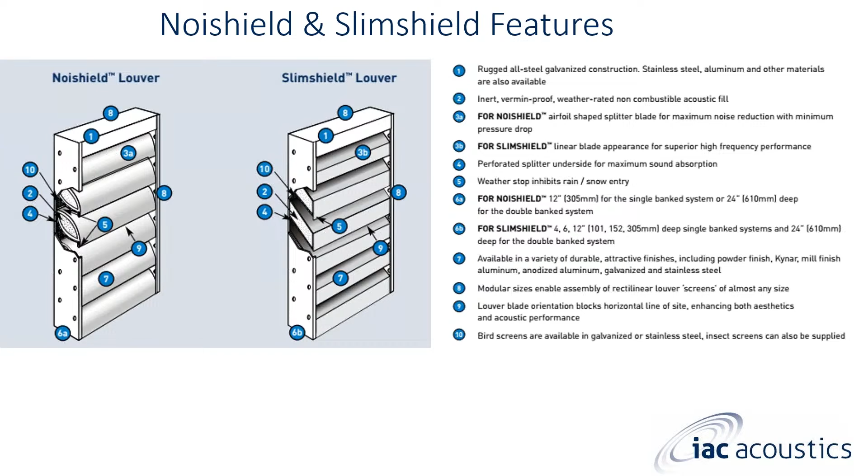Moving on, all of IAC louvers have been developed in response to specific requirements from acoustic consultants, consulting engineers, building owners, and contractors. Again, everything has been tested. The complete range of acoustic louvers for controlling the airflow noise in and around the air handling systems.

Acoustic louvers for use around mechanical plant installations where acoustic barriers may be required and airflow still needs to happen. And then again, aesthetic louvers that can come in many different shapes and sizes and can still carry performance requirements. All of our louvers have been performance tested utilizing the AMCA standard 500L testing criteria.

Again, our entire line of HVAC louver products provide one of the most economical choices for solving the wide variety of airflow and noise control problems encountered in HVAC engineering. As you can see on the left, we can do all different types of shapes and sizes. We've done multiple arrays. We've done circles, we've done stars, we've even done triangles.

So you can work up a sketch in CAD or just by pen and paper, send it to us, and we can work that up ourselves with our engineering team. And then we can also put together a nice comprehensive package for you, letting you know how the performance is going to be and where the performance will be within that size or shape of louver.

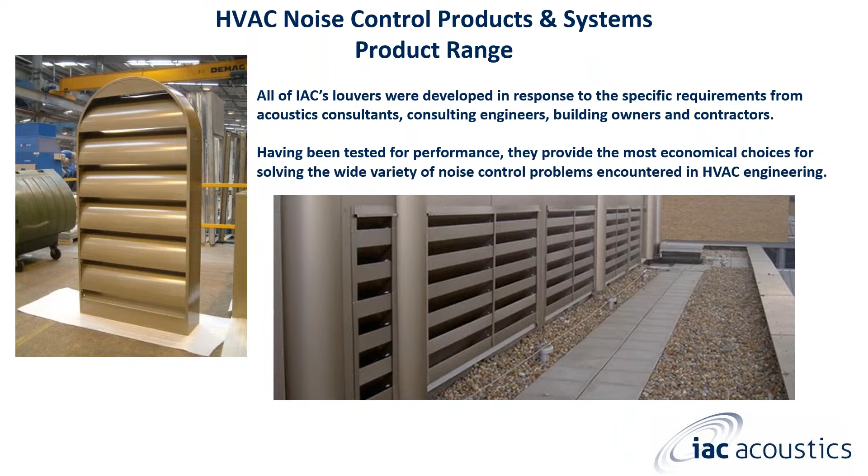Duct silencer and louver operating principles. When you look at a louver, you have reverse flow and forward flow on the left-hand side, on the outside, and on the inside, you have your sound source. Now, I get asked this question quite a bit. Should we design to percent of free open area first, or should we design to performance? I'm old-fashioned. I'm going to tell you design to performance first. Percent of free open area will literally be what it is, to tell you the truth.

There is a free area of the Model R and the Model LP, for example, here. It varies across the width because the blades are airfoil shaped. So at the intake and discharge of the louver of the original opening here, you basically have 100% of free area, right? But at the closest point it gets down to around 18 to 20% of free area. Because of the diffuser effect on the discharge side, however, you actually get what is called a pressure regain, and the louver performs much better than, say, 20%, maybe 30% free open area.

Based upon our testing and analysis, the Model R louver's pressure drop performance is equivalent to a straight bladed parallel louver with roughly 46% free open area, and the Model LP is roughly a straight bladed louver with a 50% free open area. So the pressure drop listed in our catalog is based on face velocity across the entire face of the louver, not just the free area face velocity.

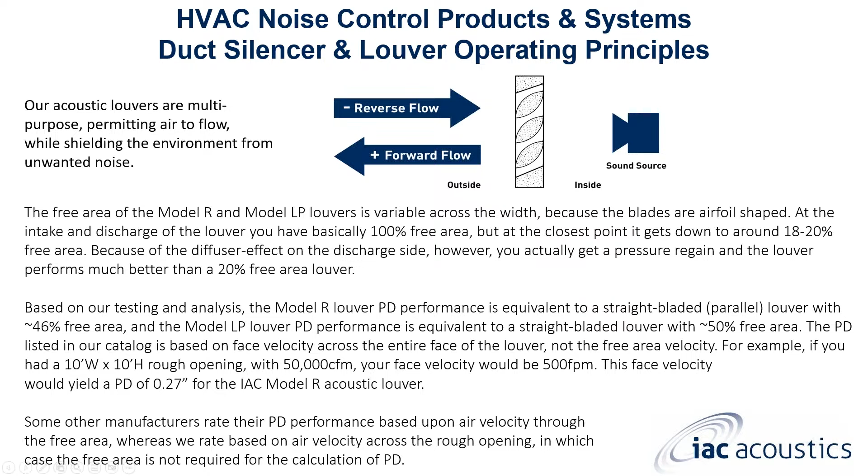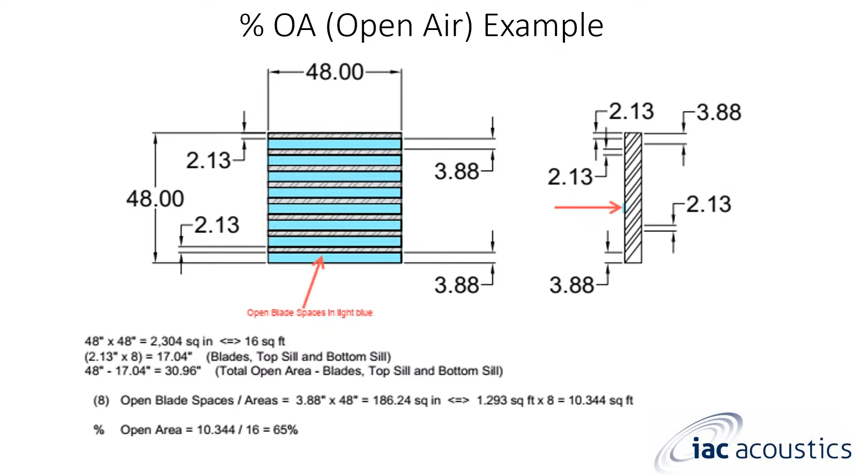Again, we like to design to performance. I always tell everybody, design to performance first. Make sure that the pressure drop is in relation to the actual pieces of equipment and it's allowing the proper airflow. Once you have both of those working tandemly and correctly, percent of free open area will end up what it is. It will not harm the system because you've already designed it to performance, airflow, and pressure drop, making sure that you're not putting any impedance back on the pieces of equipment that it is actually enclosing.

Acoustic louvers can be screens and ventilation openings. They can also be integrated as doors, which we'll see here in just a few minutes. When you look at our acoustic louver brochure catalog, we also have some typical details that are shown for supply of all supporting steelwork if necessary. We show that there's different ways of installing the louver with a flush exterior, a flanged exterior, masonry anchors, concrete inserts or anchors, flush with the interior, and then also a bolted connection to HSS type tube steel.

If you need any type of design work as well, IAC, our engineering team, and myself can actually help out with the design phase. We can help call out the appropriate tube steel, and we will also look at wind calculations to make sure that the overall height of the louver screen or louver wall or enclosure will be supported enough with the tube steel in conjunction to the wind rating that might be out there.

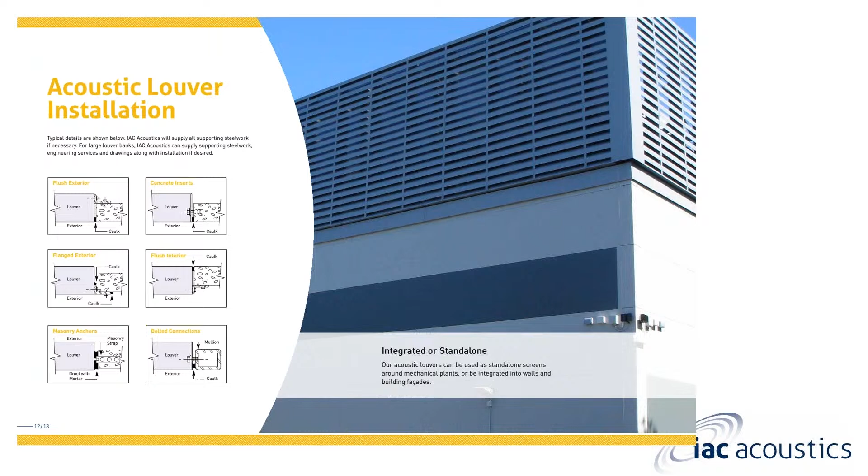When you're looking at how to specify acoustic louvers, we also have this in our catalog for our Noishield louvers and our Slimshield louvers. It gives great typical specific details for how the casings are made, out of what gauge of material. It also gives the airfoil configuration for the Noishield or the straight splitter blades for the Slimshield type. And then it also gives some good installations of how these can be used as well.

When you look at our catalog here, you have the Model R and the 2R. Again, the Model R is our regular type; that's kind of what it stands for. These are 12-inch blade spacing. Custom blade spacing is available; get with me on a specific case-by-case basis. We can do that. And the minimum starting height for these is 18 inches. That encapsulates the top sill, the bottom sill, and at least one blade.

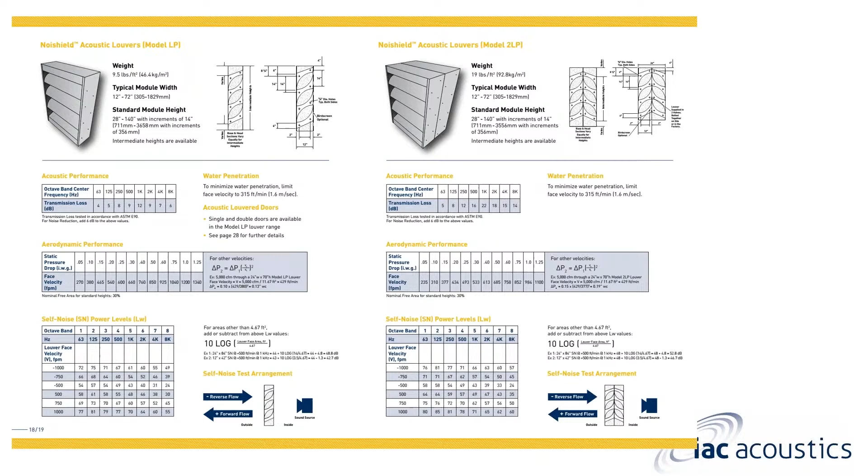The same thing with our LP. This is airfoil type, and 2LP, whether 12 inches and or 24 inches in depth. These typically have a little bit lower pressure drop, which you'll be able to see in the actual catalog. These are at 14-inch blade spacings. Again, custom blade spacing is available, but the minimum starting height for the Model LP or 2LP is 28 inches.

And here's some really good calculations, being able to see the difference between the Model R, the 2R, and the 2LP. So when you look at this, we have 160 inches wide by 309 inches tall at 24 inches in depth. This is a humongous louver screen, at 116,000 plus CFM. When you do the math, look at this equation up here that we have done, down in the aerodynamic performance column area in the mid-range. On the right-hand side is that equation. I apologize, it's a little blurry there.

But again, that is right in our catalog. We like to be able to be transparent about how the calculations are derived. And so when you plug in this needed information, you get the entire area here at 343 square feet. Then look at the face velocity at 116,538 CFM. You divide that by 343 square feet to get your feet per minute.

When you look at this, the delta at 0.25 pressure drop is actually at 0.25 pressure. They're pretty equal with what is down here underneath the static pressure drop under aerodynamic performance at 0.25. Now, when you look at this and you see that that's 377, if you look at the Model 2 LP louver calculations, almost cut in half, really, if not more.

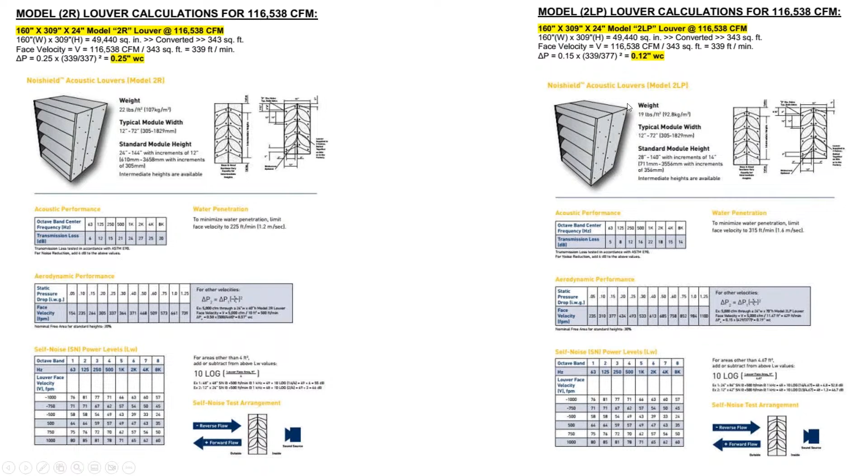It's at 0.12, because when you look at the same velocity, 339, you have to come over here then to the same face velocity catalog, and it is starting at 0.15 at 377. So when you do the math, that still calculates there. It is lower, 339 feet per minute than 377. You calculate that, you square it, and you get 0.12 inches water gauge for pressure drop.

We also have the SL12 and SL24, just like the Model R and LP, but these are straight splitter blades. So we have the capability here, and these actually carry a little bit more transmission loss. And when you're talking about transmission loss, that is the loss that you're looking to recover on the outside. It's a little bit different than insertion loss.

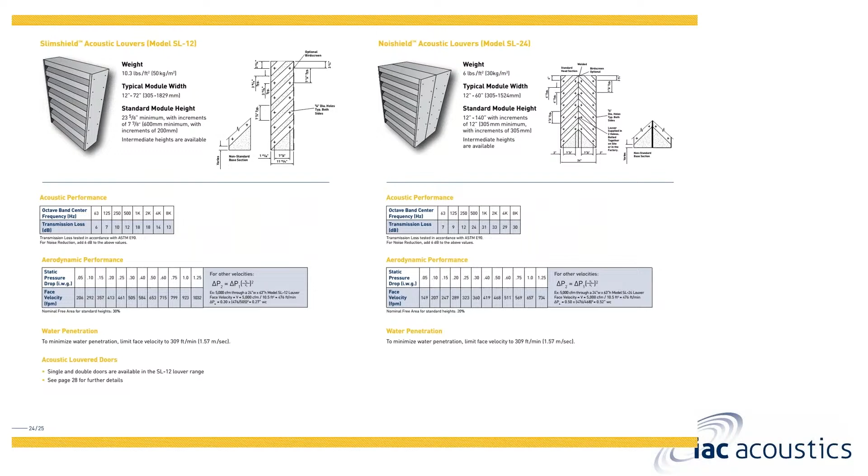Insertion loss is when you measure before and after the sound propagation when you're putting the silencer inside something, right? So you're measuring before and afterwards. Here, transmission loss is measured on the outside of the louver. Thus, what you're taking care of is the noise and airflow on the outside of the louver from the pieces of equipment that are creating the sound.

We also have our SL4 and our SL6 type louvers, the 4-inch depth and 6-inch depth. And again, we're looking to bring forth here about mid to late spring the SL8 and the SL10, which you will see out here in the next few months.

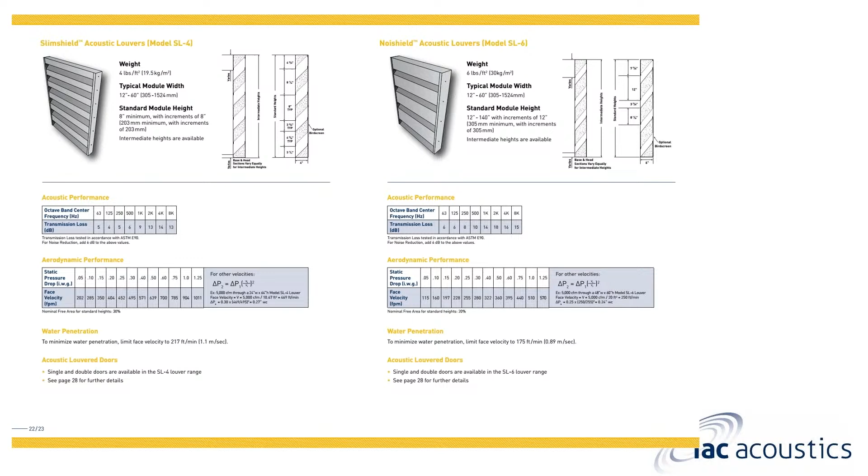And let's look at an SL6 louver calculation. Again, when you look at this, you're taking this one here. This is kind of a smaller CFM, but we converted BTUH 29,700 to CFM. And then, again, I apologize. I needed to scratch that out. I just noticed this. Actually, this is at 135,000 CFM for the SL6. Not bad, but this is a humongous area here. It was my bad on copying this over.

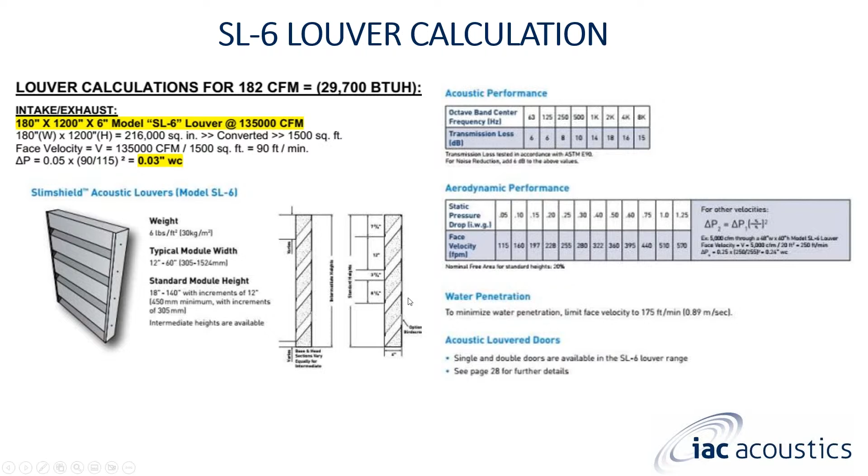So when you look at this, it's 180 inches wide by 1,200 inches high. 216,000 square inches, converts to 1,500 square feet. Face velocity, 135,000 divided by 1,500 at 90 feet per minute. When you look over here at the table, you get 115 right here at 0.05. So you use that as your delta for your pressure. And you then get 0.03 inches water gauge pressure drop. That is excellent for this size and depth of louver.

Looking at an SL4 calculation, this one here I copied right. We're at 1,200 CFM here. So again, a little bit smaller louver. These actually do great in smaller geographical areas as either a small little opening enclosure or even a small little wall type single enclosure as well. This one here calculates out at 0.08 inches water gauge.

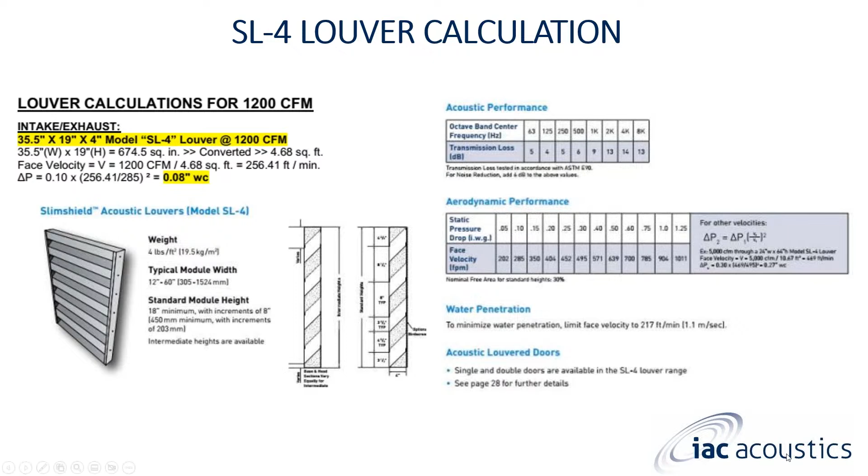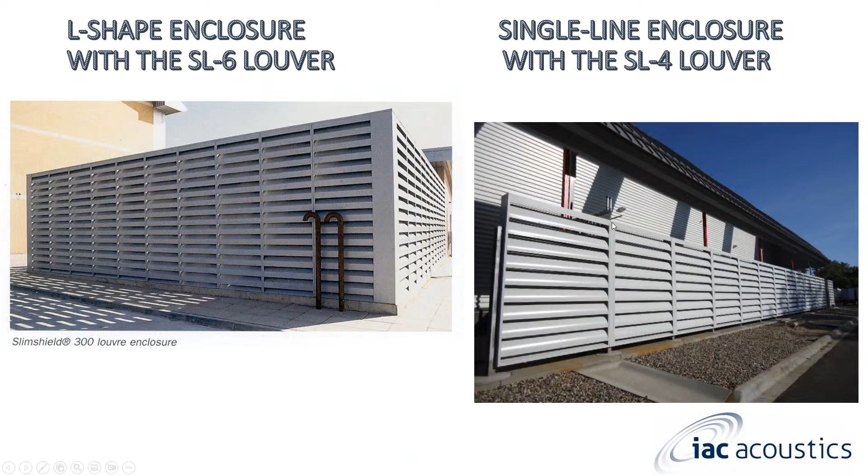Let us know. And again, you can see right in through here, as the louvers are mated together side by side and nested, that there's flashing that we can provide as well on the louver framing system in order to hide the C channel.

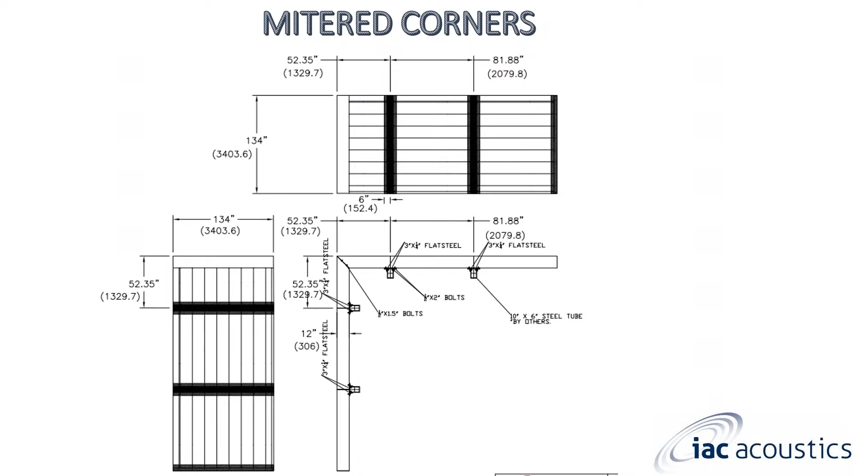Mitered corners. This has become kind of a nice custom type requirement that we're seeing a lot on rooftop louvered enclosures. If you go back to the rooftop louvered enclosure here, you can see that this is actually the solid piece right here, this solid here. You can see that solid on the outside, this solid mates up. You can kind of see that right behind here, right? So this utilizes the square format, right?

When you look at how louvers can actually be designed now too, it can create a nice mitered corner to where the louver blades, this is a squared off section from the inside. This is this angled piece right here that's solid. But then what happens is that you get the louver blades coming together to create a nice aesthetic parallel look. So that way it looks like it actually comes down the front face here and turns and goes down this other nice outside front face as well. So you have a really nice aesthetic look.

Back behind here, the black shaded areas that you see here are the actual tube steel, the 10x6 tube steel. These are actually called out by others, but we can also showcase how you're actually going to adhere and attach to that tube steel. Our engineering team has the capability of designing this and actually providing these type of details. Case here is 3" by 1.5" flat steel, and then you actually have your 1.5" by 2" bolts that are connecting to that as well.

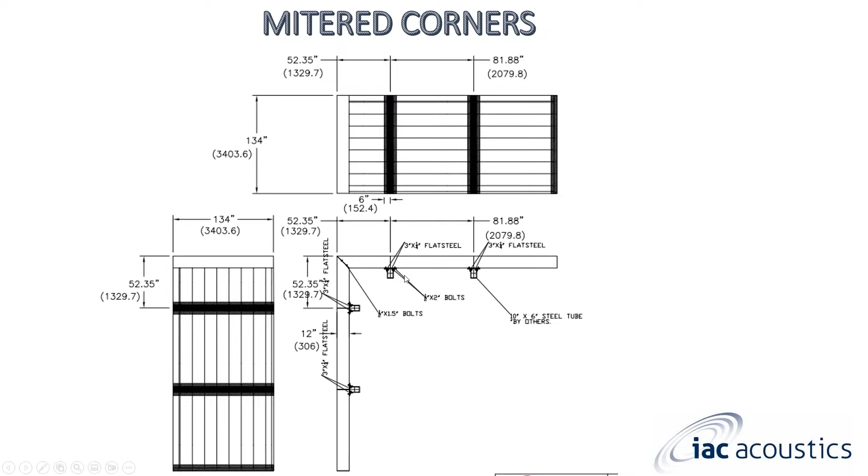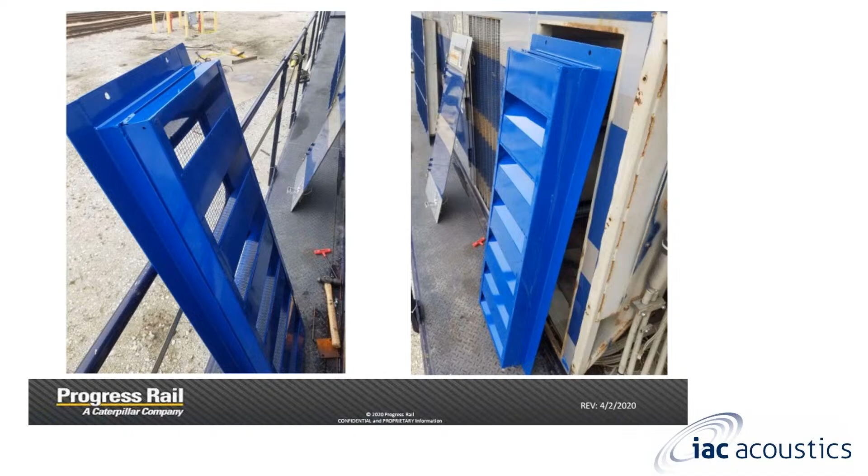So if you're ever on the roads and you see a nice train coming by, look for the Caterpillar company engines, and on the front of these engines, you're actually going to see our SL4 type louvers. Again, these help to make sure that the locomotive engines run at peak performance, at the same time making sure they hopefully never, I don't believe anything's ever 100%, but 99% of the time, they should not overheat.